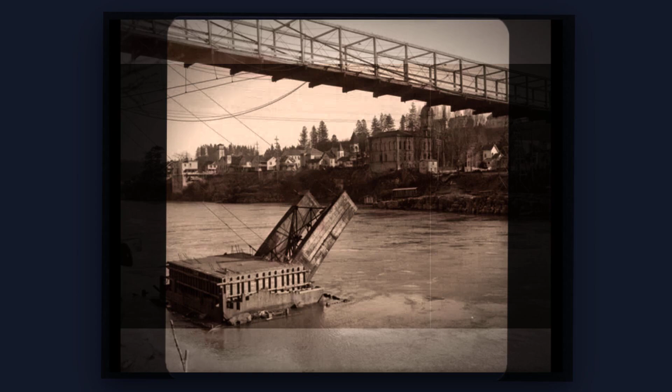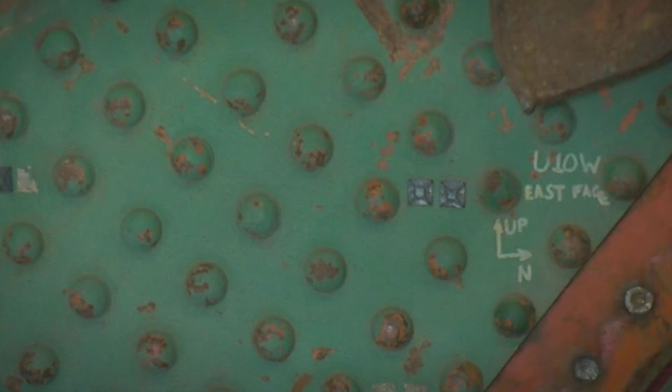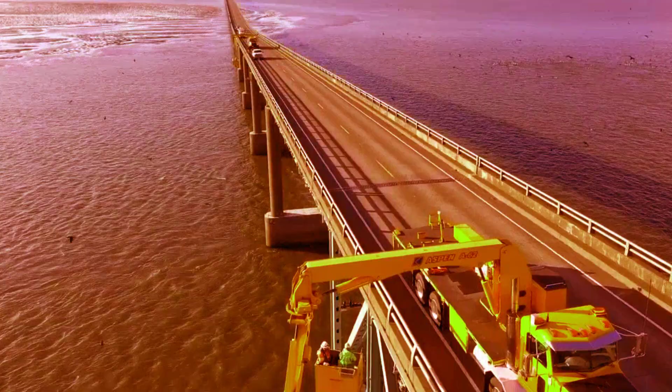Workers died building it. A storm with winds of 100 miles per hour cracked its steel. By 2003, inspectors found that 70% of its gusset plate thickness had corroded away. Oregon's deadliest bridge carries a fracture-critical designation. If one component fails, the entire span comes down. Thousands still cross it every day. And the reason it's not being replaced has nothing to do with engineering.

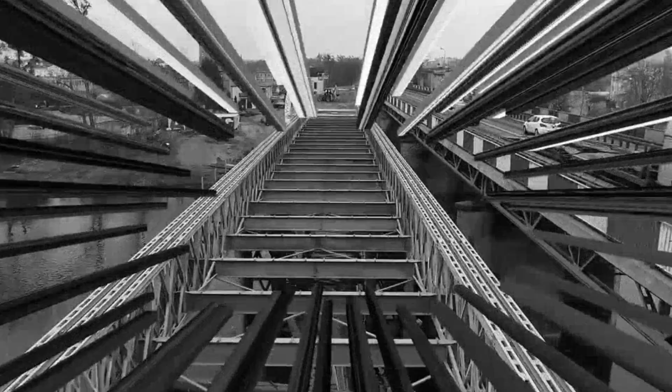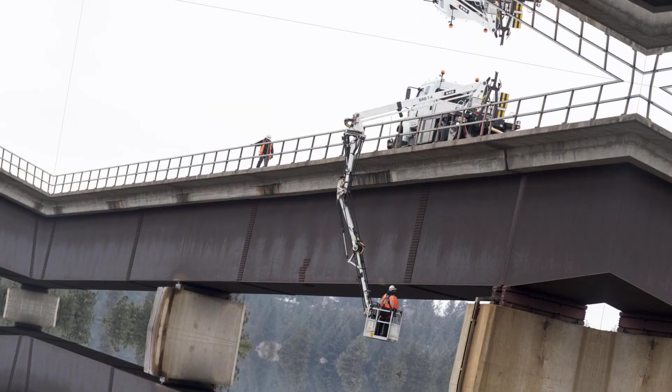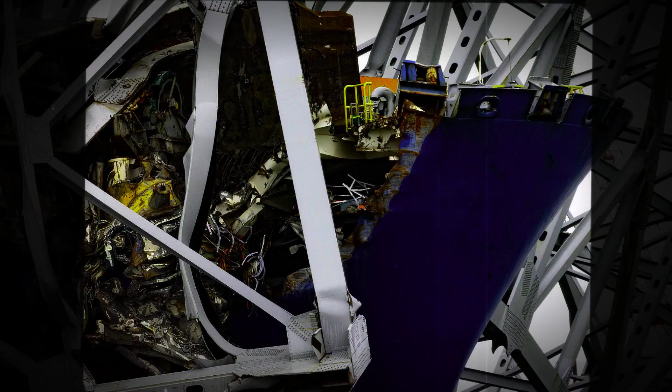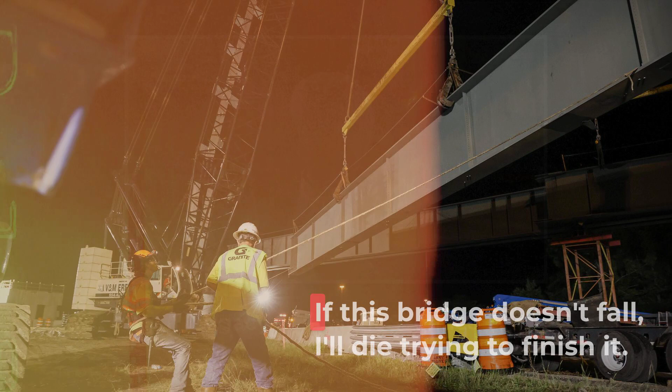Falls from scaffolding were the most common cause. On a cold morning in March, a crane overturned, pinning a carpenter beneath twisted metal. His name was James Peters Sr. His son, Jim Peters, would later recall in an oral history interview, 'If this bridge doesn't fall, I'll die trying to finish it.'

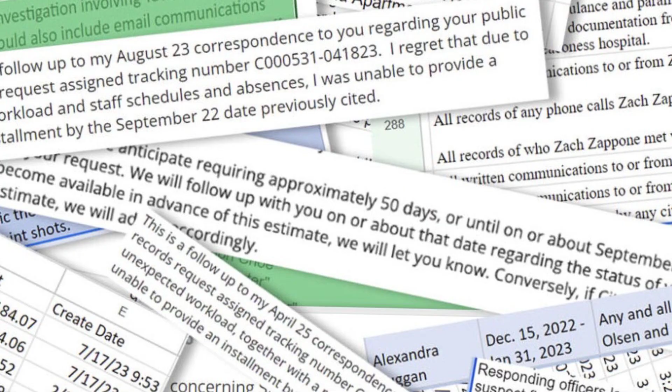Those words, spoken the night before the accident, still echo in the Peters family. The loss was not just a line in a state report or a name on a union ledger. It was a father who never came home, a husband whose paychecks stopped arriving, a story replayed in kitchens up and down the valley. Contractors pressed hard to finish on schedule.

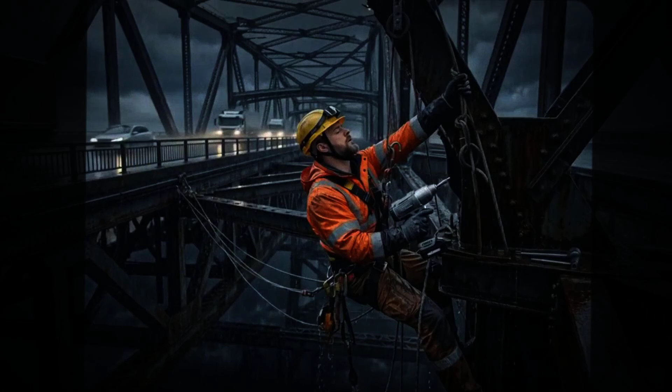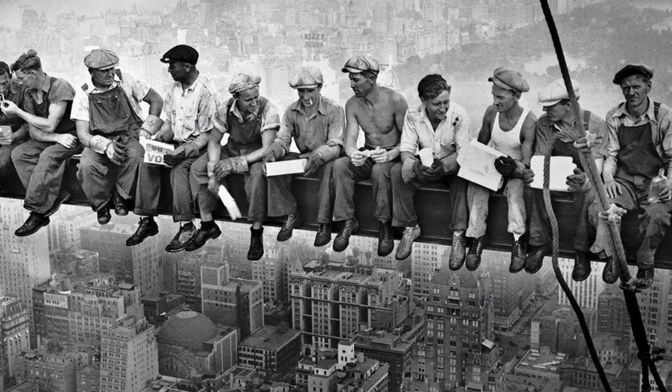Deadlines were tight, and every day lost to weather or equipment breakdown brought the threat of penalties. Safety equipment was basic: hard hats, canvas belts, and little else. Laborers worked with lead-based paints and asbestos insulation, often without knowing the risks. In one incident, a scaffolding collapse sent 3 men into the river below.

Only one survived. The union's incident logs record names the state never counted, men whose deaths were attributed to non-occupational causes or lost in the paperwork after a 1998 office fire destroyed part of the construction archive.

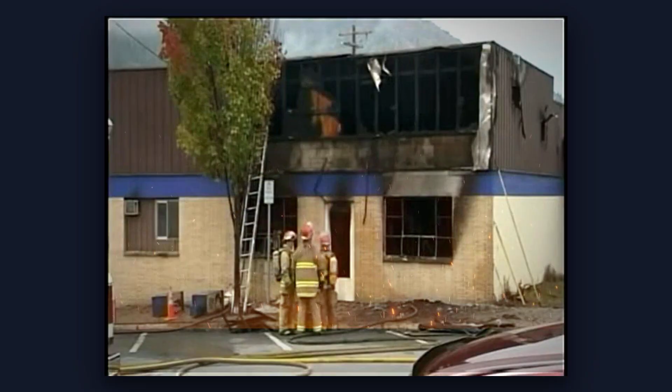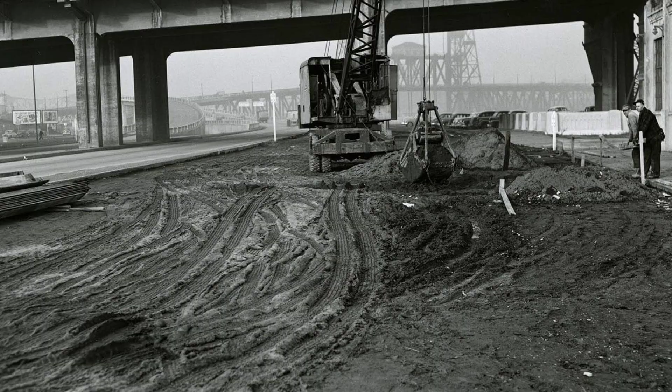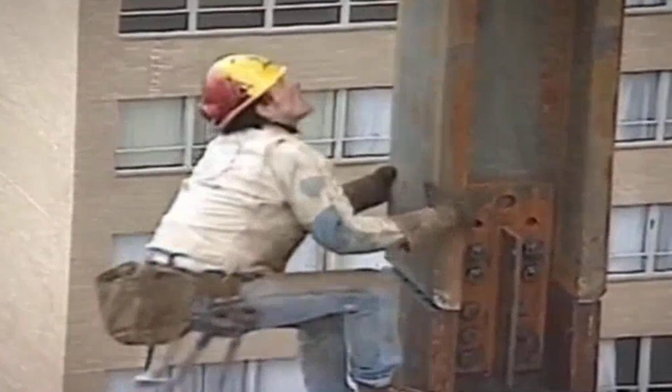The pressure to finish fast came from the top. State officials saw the bridge as a symbol of modern Oregon, a promise to link rural communities to the rest of the state. But the rush to open the span meant corners were cut. Overtime hours stacked up. Workers took risks to keep the project moving. Families like the Peterses, the Alvarezes, and others paid for that urgency in ways that numbers alone can't show.

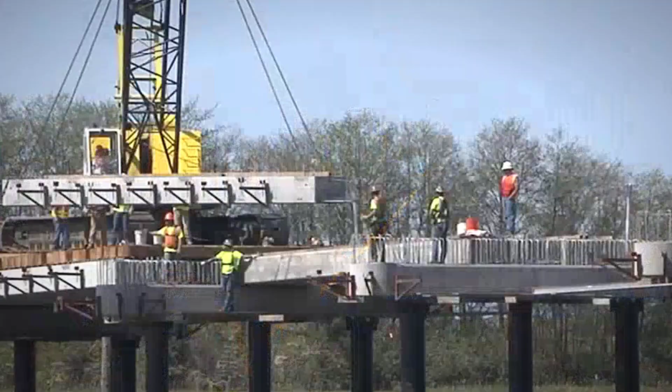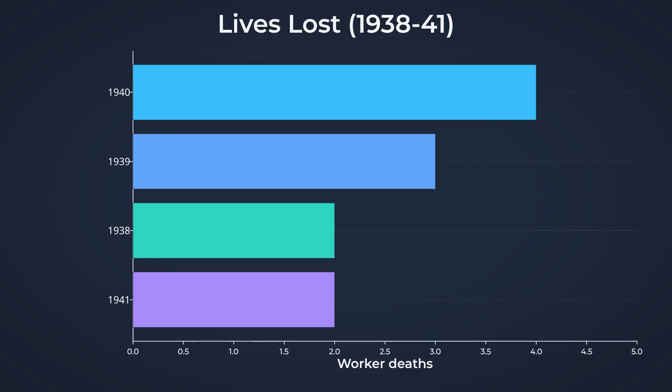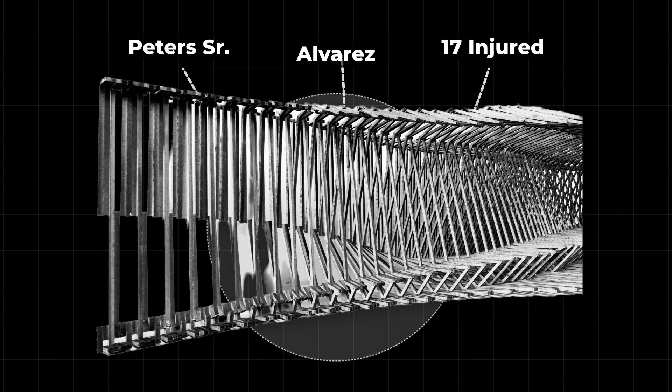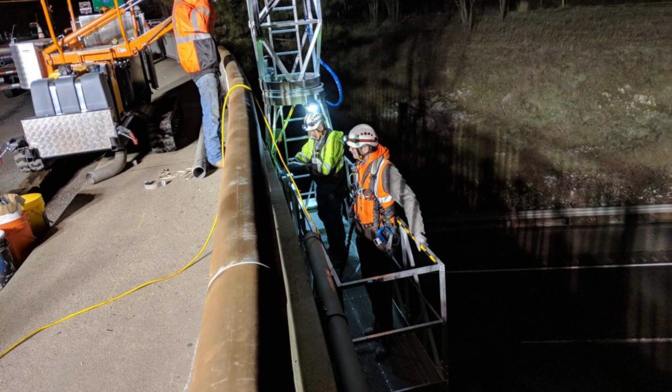By the time the last girder was set, the bridge was already carrying a hidden burden. Its age isn't just measured in years, but in the lives lost to build it. The stories from that era, some told, some buried in forgotten files, reveal a vulnerability built into the structure from the very beginning. The bridge would stand, but the cost would linger, waiting to be counted every time someone asks why it's still here, and why those early warnings went unheeded.

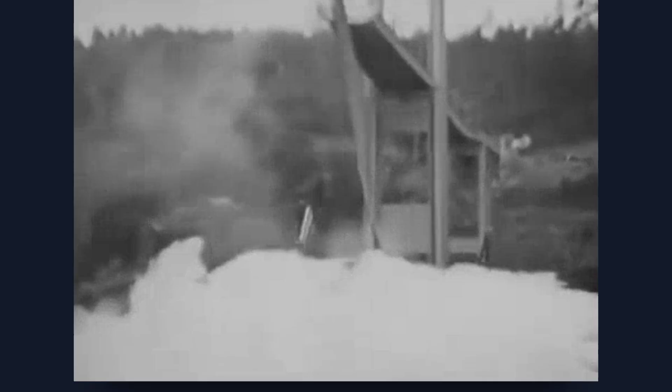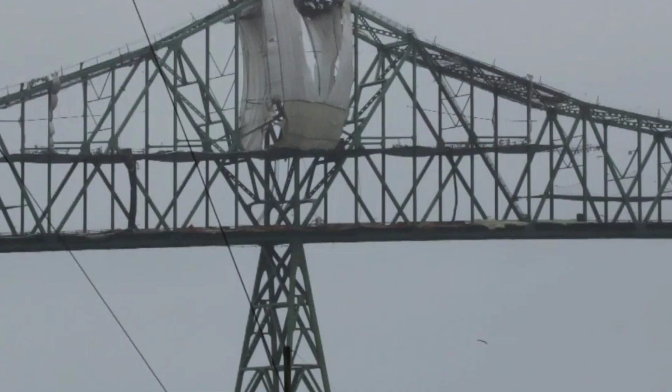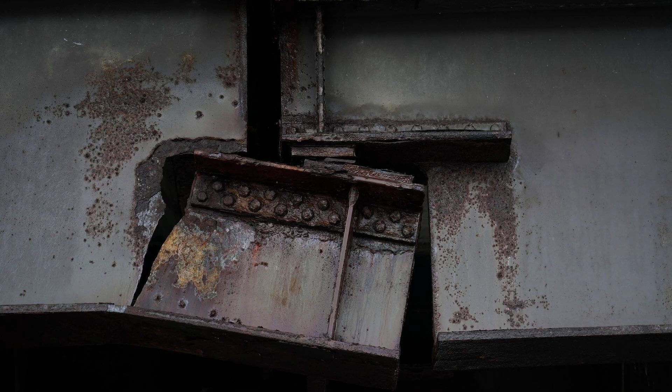As the gust front hit, the northbound lanes were closed in a rush, but not before the deck began to flex and shudder. Photographs from that day show steel beams bowing under the relentless pressure, and audio recordings captured the groan of metal straining at its limits.

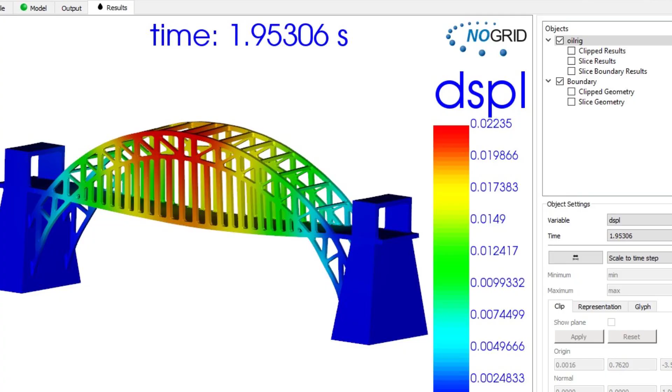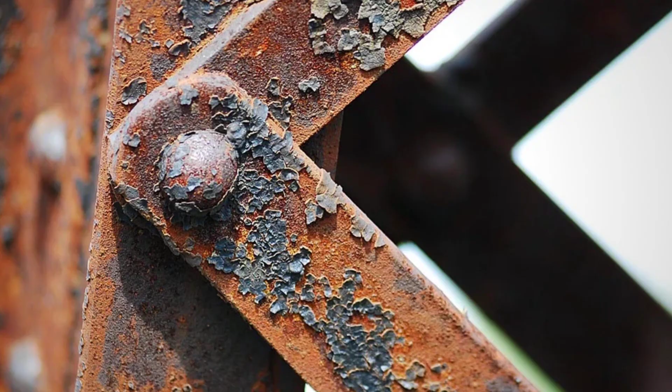Dr. Elaine Cheng, then a young meteorologist with the National Weather Service, remembers the event with clinical clarity. 'The wind was not just high, it was a sustained pressure system that tested the bridge's design limits in a way no prior testing had anticipated.' Her field notes, later published in a technical journal, described micro-cracking in the main girders, hairline fractures invisible to the naked eye but unmistakable under ultrasonic inspection. These cracks, left unrepaired for more than a decade, would become the bridge's silent inheritance from that storm.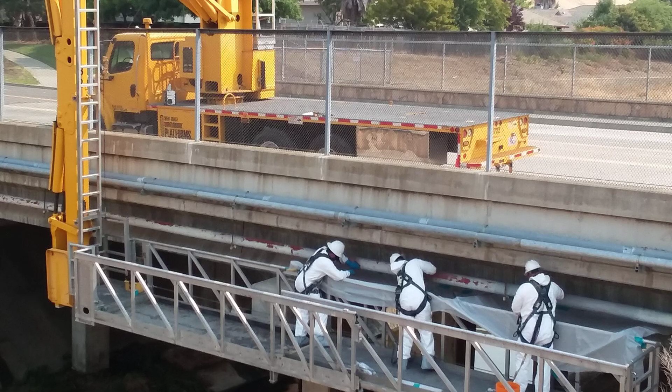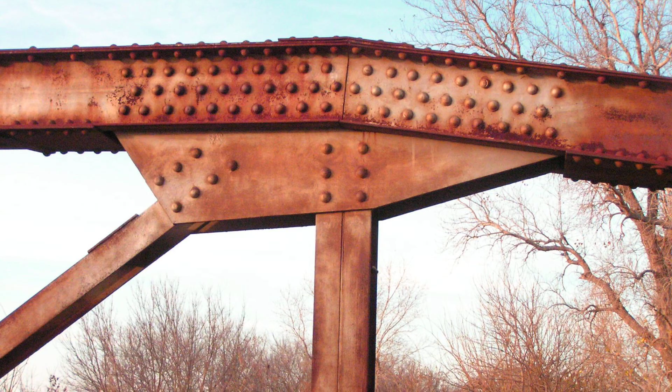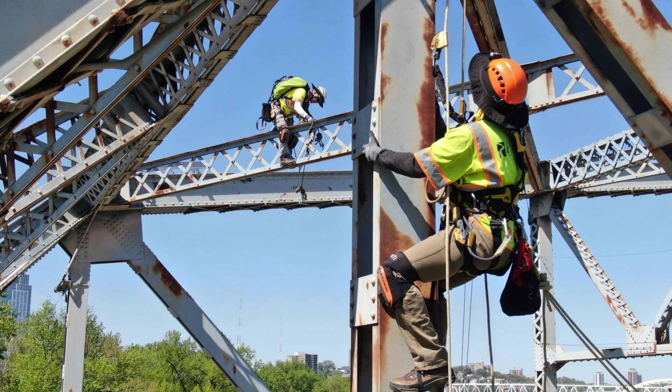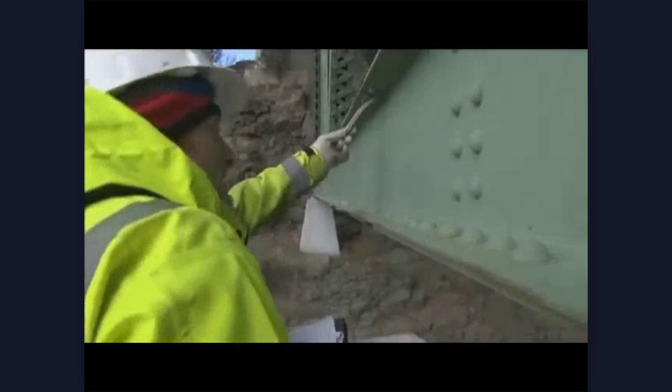The first formal inspection after the derecho, conducted in 2003, revealed something far more alarming. ODOT engineers found that several gusset plates, thick steel connectors critical to the bridge's stability, had lost up to 70% of their original thickness to corrosion. A simple tap with a hammer sent flakes of rust tumbling to the ground. The inspection report flagged the bridge as fracture critical, a term that means if one of these components fails, there is no backup to prevent collapse.

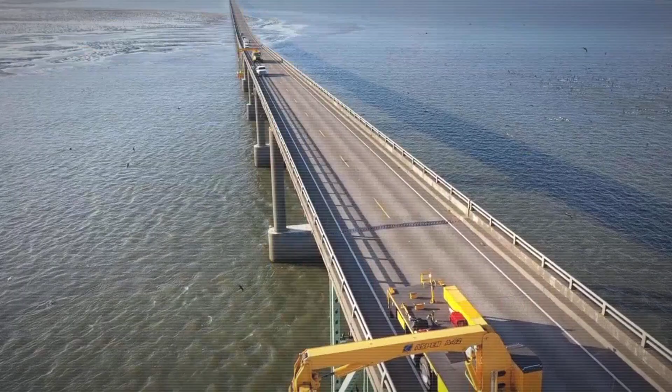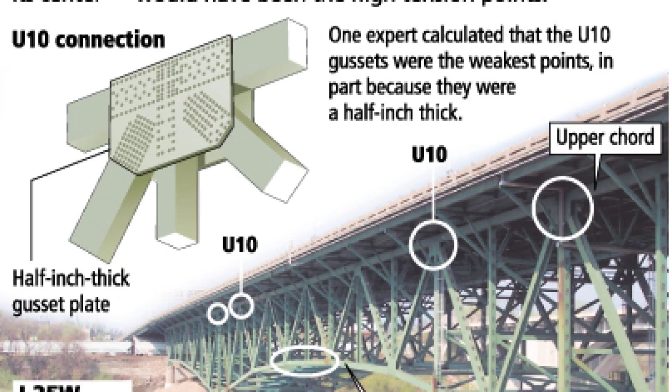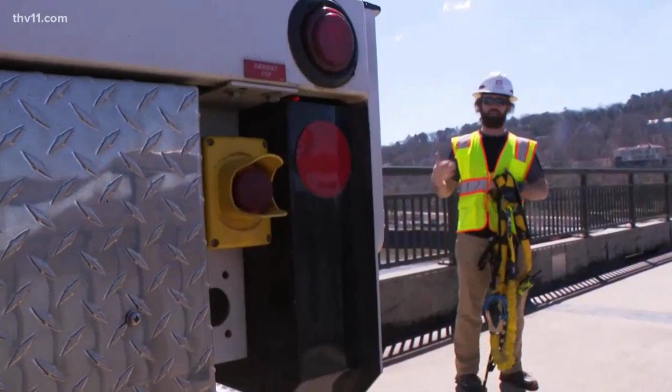The bridge's name was entered into a federal list of structures requiring urgent attention, but the recommended reinforcements never came. Dr. Cheng's analysis, paired with the inspection data, turned what had been a hidden vulnerability into a measurable risk. For the first time, the bridge's weaknesses were not just whispered among engineers, they were documented, quantified, and entered into the official record. The technical language of those reports, loss of section, fatigue cracking, fracture critical, became a new kind of warning, one that would echo through every subsequent inspection.

Behind the jargon was a simple reality. The bridge was no longer just aging, it was actively deteriorating, and everyone with access to the reports could see it. The next step would come from inside the agency, as internal alarms grew louder and whistleblowers began to escalate their concerns.

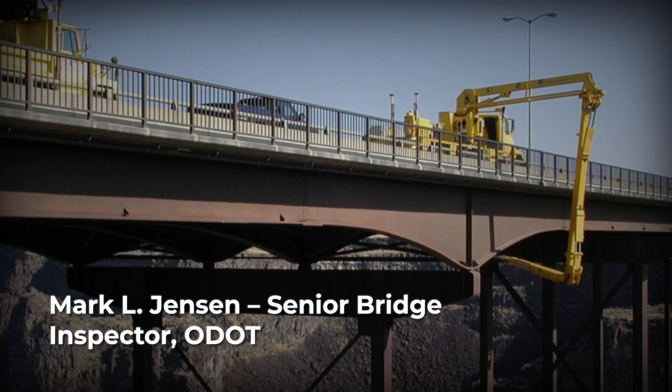Mark L. Jensen, a senior bridge inspector at ODOT, spent years raising alarms that rarely left his inbox. In a string of emails obtained through a public records request, Jensen warned that the bridge's load rating calculations could not be trusted. He flagged the lack of a real-time monitoring system, calling it a blind spot in the agency's safety net. Instead of action, Jensen received a formal reprimand for overstepping authority. His warnings, laid out in clear technical language, were quietly filed away.

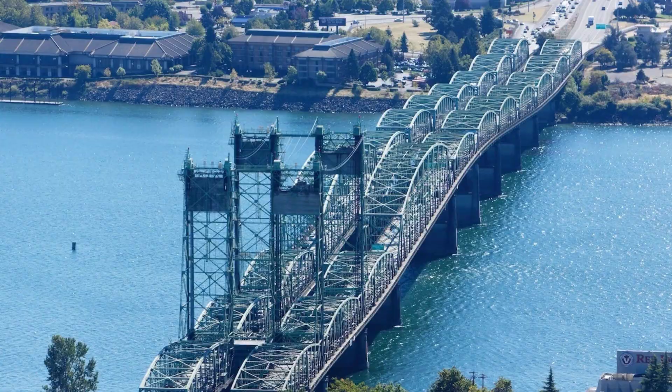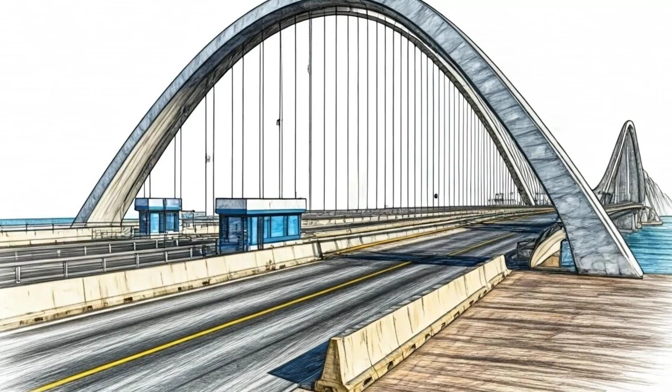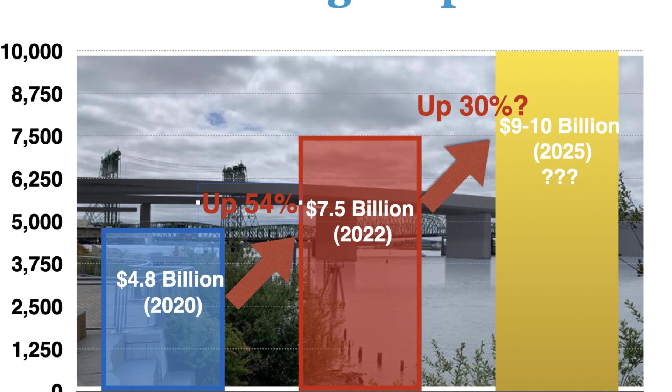It was not just internal resistance. Over the past 4 decades, every major replacement proposal stalled in the same political gridlock. In 2001, legislators debated a public-private partnership to rebuild the bridge as a toll crossing. The plan failed in the House, with only 45% in favor after intense lobbying by toll operators and construction suppliers. The cycle repeated. Studies were commissioned, costs ballooned, bills were debated, then shelved. Meanwhile, the bridge's fracture-critical status remained unchanged.

Knowledge of the risk was never the problem. The real obstacle was a system unable or unwilling to act, even as the economic stakes grew with every passing year. Captain Thomas Reynolds had spent nearly 4 decades guiding tugboats beneath the bridge's shadow.

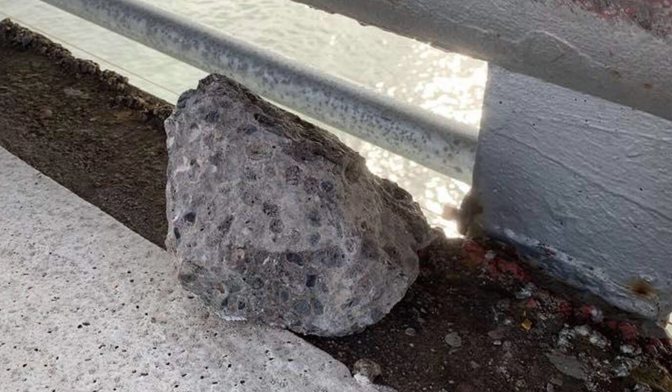On June 12, 2017, his routine run turned into a disaster. A chunk of concrete, weighing close to 15 kilograms, crashed down from the northbound deck and smashed into his vessel's starboard hull. The impact tore open the side just above the waterline. Seawater surged in, alarms blared, and Reynolds ordered his crew to abandon ship.

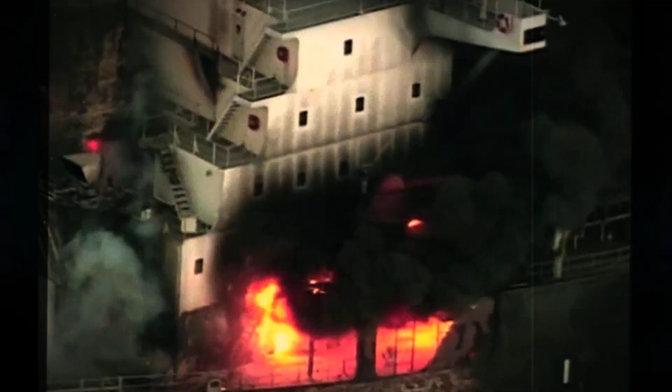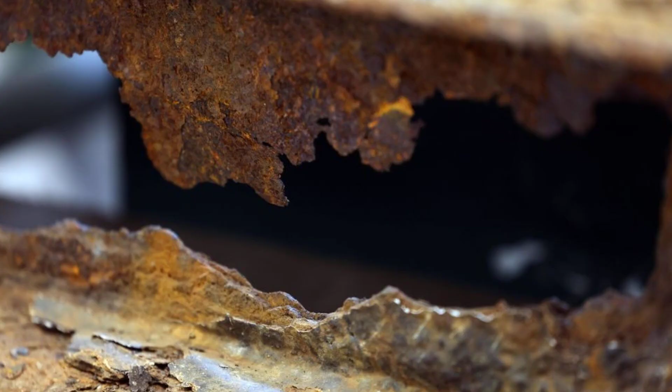The port of Astoria halted all cargo traffic for 2 days, while inspectors combed the river for debris. The shutdown cost the port an estimated $2.3 million in lost shipments and dock fees. Reynolds later described the bridge as a hazard that sheds material without warning. He pressed lawmakers to act, but the sense of urgency faded as quickly as the headlines.

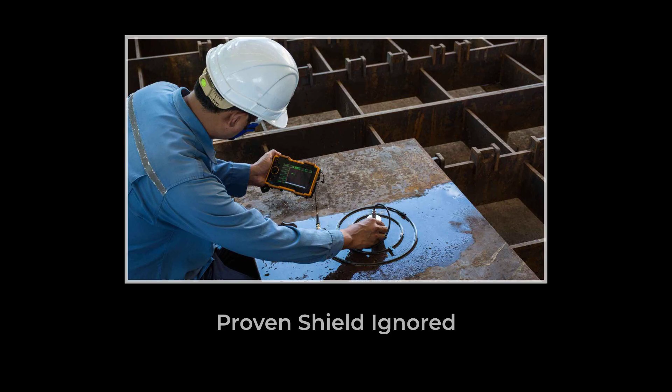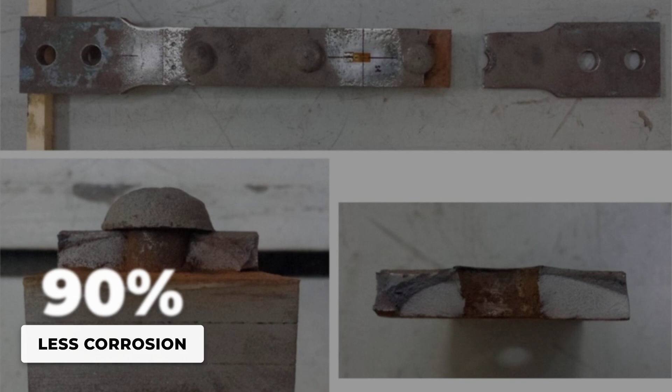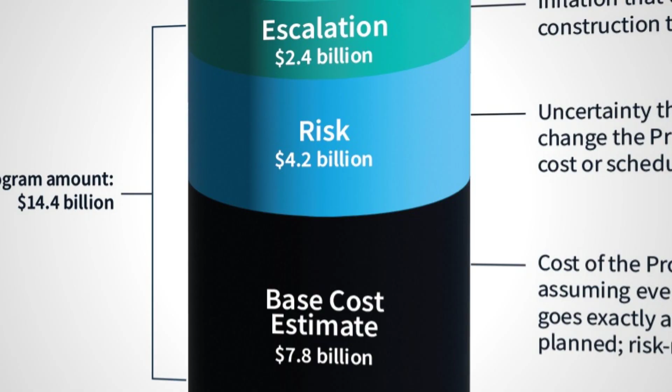Years before the accident, engineers had tested a corrosion control system, zinc-rich epoxy coatings and cathodic protection on several steel plates and bearings. Lab results from the University of Oregon showed a 90% reduction in corrosion over a year, and field tests confirmed the effect. Yet by 1999, the pilot was abandoned, dismissed as too costly or unproven. The untreated steel kept rusting and the bridge kept shedding.

For Reynolds, the danger was not just theoretical. It was a missed fix that could have prevented a near-fatal night on the river.

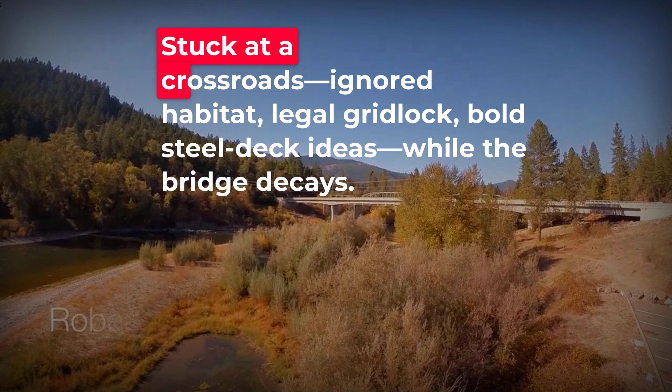Sensors capable of detecting strain and microfractures are scheduled for installation across the bridge in 2025, funded by a $200 million federal grant under the Infrastructure Investment and Jobs Act. These devices promise real-time data, but their arrival comes as legal action threatens to stall any major overhaul. An environmental lawsuit filed in mid-2025 claims that the Oregon Department of Transportation's replacement plans ignored critical habitat studies, leaving the project in limbo for at least another year.

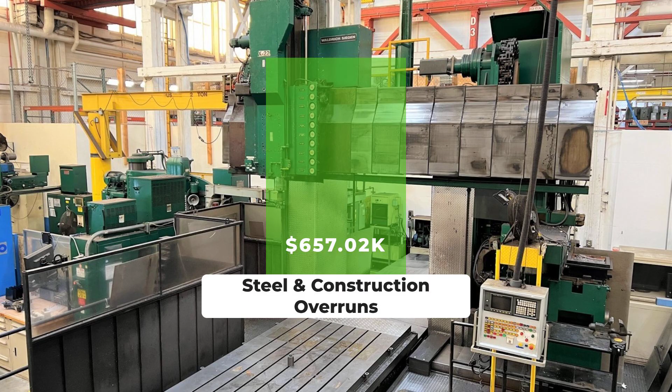Meanwhile, director Sarah K. Monroe faces growing scrutiny. Her background as a senior engineer and her campaign contributions of $660,000 from steel and construction interests have drawn questions about her priorities.

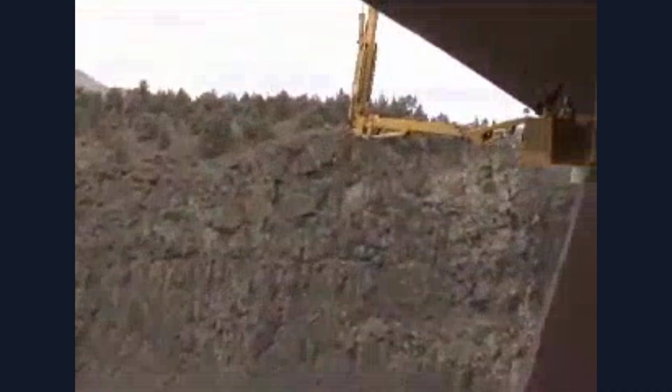Monroe insists on a phased, data-driven approach, allocating $35 million for inspections and repairs, less than a third of what full replacement would demand. Yet outside Oregon, a modular steel deck system recently passed a statewide pilot, offering a glimpse of a faster, lower-cost alternative.

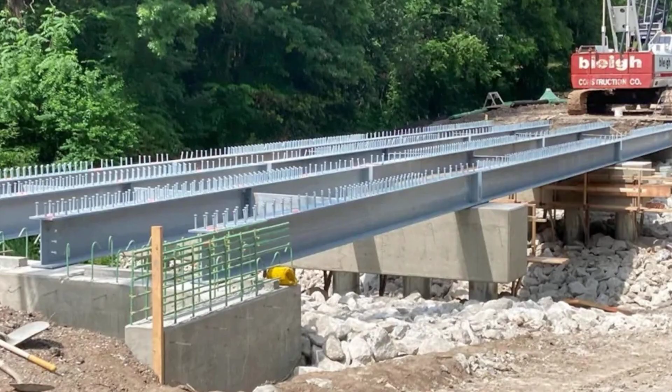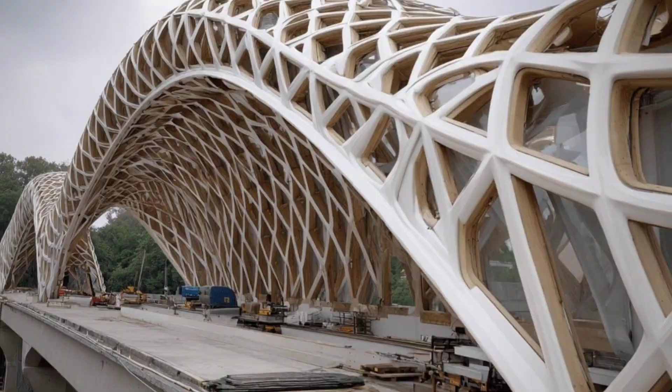The decision now hangs between incremental upgrades, mounting legal barriers, and the possibility of a modular leap. Each path carries risk, but the bridge waits, unchanged, as political and technical arguments stretch into another year. Every day, tens of thousands depend on a structure one flaw away from catastrophe.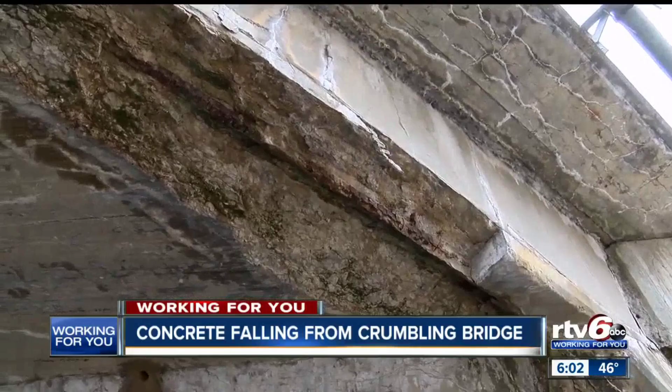Infrastructure doesn't age gracefully, it erodes in plain sight. Until action matches the risk, Oregon's deadliest bridge stands as a warning. Safety delayed is danger accepted. What would it take to finally tip the balance?